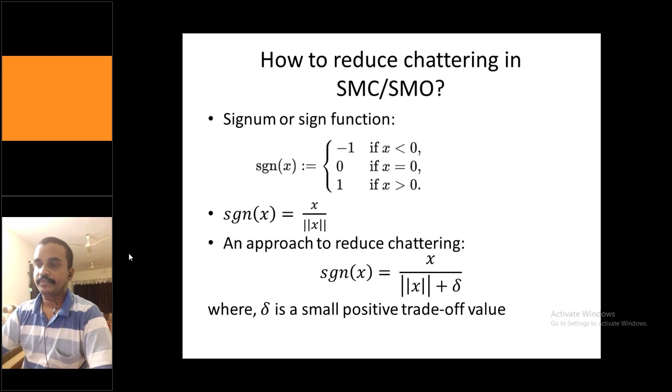So the approximation here is, if I write the signum function as x by norm of x plus some small tiny value of delta, the delta is a very small positive trade-off value. I will tell you what this trade-off is about.

In the code for sliding mode control, even the observer, we might be using some sign terms. What you have to do is replace this, USMC minus C into X, rho, keeping the rho the same, where the sign is there. We saw sign of sigma is for the sliding surface. So you just replace sign of sigma by sigma over norm of sigma plus 0.001, and this delta is what I have chosen for my particular application.

What will be the real-time implication of this delta when you use it for practical applications or other things? We will see that in a minute.

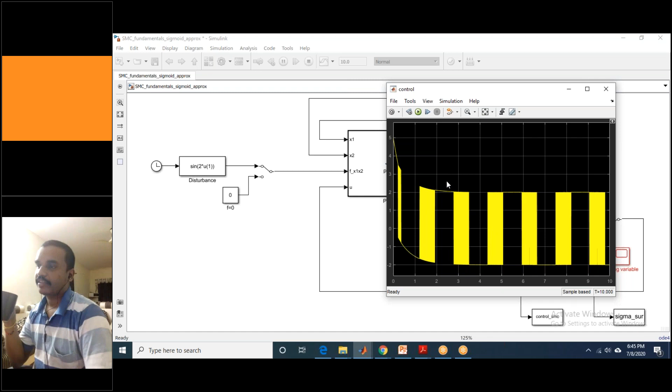And now I have connected to the SMC. There are two SMCs, one with the sign function and another one with the approximated sign function. So now I am operating our old sliding mode control with the sign function, and you can see that the control is highly chattering. There is the effect of chattering.

And now I used a 1 minute modification in that one. I just replaced that sign formula with sigma by norm of sigma plus delta. You can see that now I have switched to the other one. And now if I'm clicking this one...

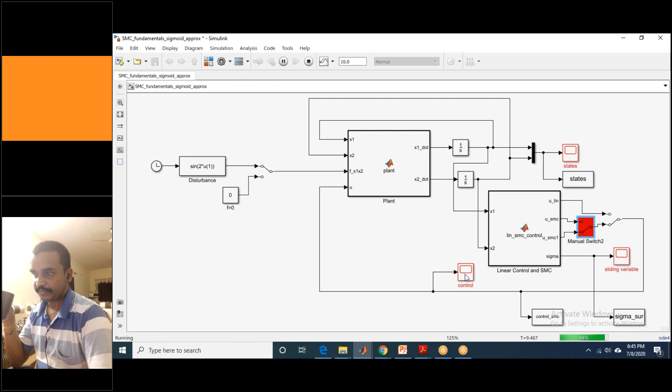First of all, I have to see whether there is any compromise here. You can see the states are very fine - both the states are converging. And this is the control signal. You can see the control signal is also smooth. So this is quite realistic for real life systems.

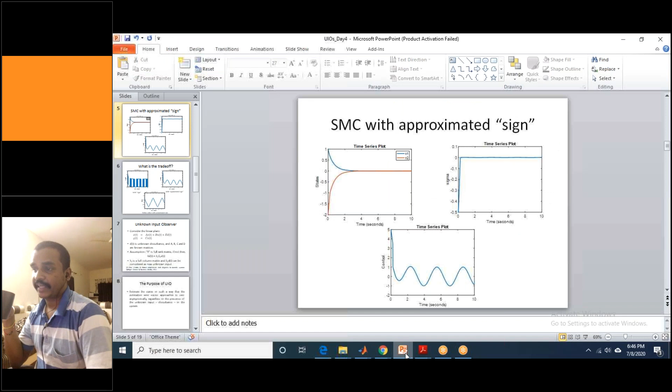So whatever denominator we are adding here, you can see the same thing - instead of going to zero, the sliding surface will have a small bound. So it will settle in that bound. How to select this is based upon your plant. If your plant parameters are very small, like in the milli or micro range, then you can select this as small as possible.

If your plant parameters are very large, then this delta value can go to very large values as well. So there is a trade-off. I have selected 0.001, 1 milli, and you can see that it is 1 milli, but nothing significantly different - you can see the difference in the plots.

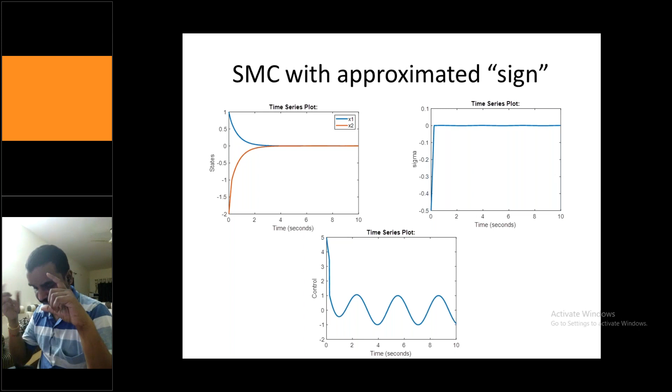This shows that sliding mode control is a good choice for several real life applications because it makes the system independent, or it actually decouples the disturbance or the faults from the system performance. So as soon as the sigma reaches zero, then automatically it makes the system insensitive to the disturbance. It doesn't matter how much disturbance you add, your sliding mode control will ensure that, provided it should be bounded, and only the bound we should be aware of.

One can always argue that I will select a very large value of bound and ask my sliding mode control to work for all world problems - it is not like that. If you are selecting a very large maximum value of the bound, your controller will become conservative, in a way that by one controller you are trying to deal with disturbances from zero to infinity. Then again there will be some issues in the control action. So there is a compromise based upon the problem at hand.

So this is the one. This is a sliding surface sigma. You can see that 0.001 is what we have selected. It is reflecting here.

Now what I want from you is you take 10 minutes of time. Please implement this. This is very, very much essential for the people who want to really dig into the sliding mode. This is the small trick which generally people don't know, and they will go for higher order sliding mode.

And other things. But in industry, it is working here, though it is heuristic in a way. This adding of delta, it is working. So when we gave this solution to some industry, it doesn't matter to them, as soon as it is working and it is very reliable, what kind of control you are using. If it is proven, and if you can prove on a prototype, and if they have a certain test simulator or some HIL system, if it is working fine for all kinds of different tests, they will do all kinds of tests.

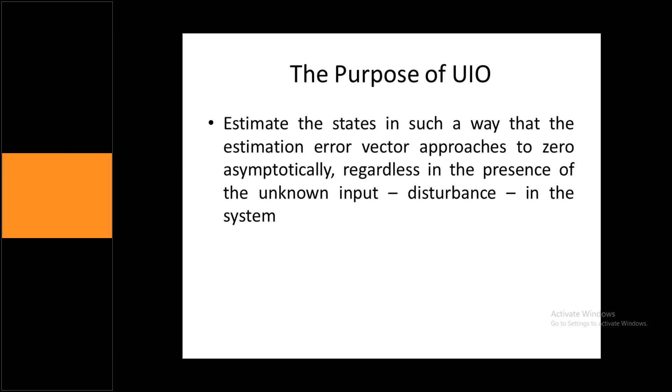For the time being, we assume that our purpose is to estimate the states of a plant in the presence of unknown disturbances. You don't know what is the unknown disturbance. It could be anything. It could be sine wave, cosine wave, noise, external disturbance, and so on. So we will see what is this.

The first step here is we have to select the observer structure like what we selected yesterday. It has two parts: one is the linear part, and the other is the non-linear part. The linear part is very much similar to the Luenberger observer, but the non-linear part has the sign term. So here also, for the unknown input observer, we are selecting two different parts. So this is the observer structure.

You can see z dot equal to what I'm interested in. I am interested only in this x hat. X hat is the estimation, the estimated value of the states x. So what is this x hat? X hat is nothing but z plus h into y of t. So to get this z, I have to integrate this z dot.

I'm coming back to this point. What is this z dot? To get this z, I have to integrate this one. This h is unknown, and this y is the output of the plant. We know what is y, from the plant we can get it.

So the matrices F, T, K, and H are to be designed to decouple the unknown input from other design requirements. That means F is unknown, we don't know. We don't know this T. B is known to us from the plant because x dot equal to Ax plus Bu. U, the control input, is known to us. We don't know what is this K.

This is the output of the system, we know. So from this, how to get this x hat is something like this. So this is my system.

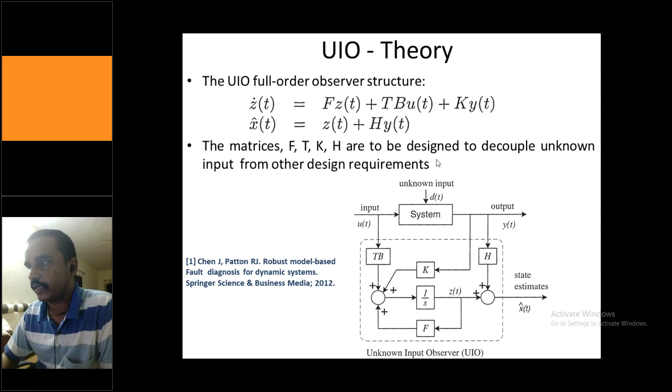So it is better if you take a pen and paper, and you do what is E dot equal to x dot minus x hat dot. You substitute x dot from the plant and x hat dot from your state estimator, then you'll be getting these things. Where I will assume that k equals k1 plus k2.

So my aim is to ensure that the left hand side, the right hand side should be f into e of t. In a very simple case, if it is a scalar case, if this f is negative, suppose minus 1, so what is this e dot equal to? Minus of e t.

So if I take the solution of this first order differential equation, if I assume that it is a scalar, then it will be an exponentially decaying function. And hence it will be stable.

If the error has so many vectors, like if error is a vector, that means e1, e2, e3, which is, if it is nth order system, fifth order system, so 5 error terms will be there. So how to ensure this particular stable error dynamics?

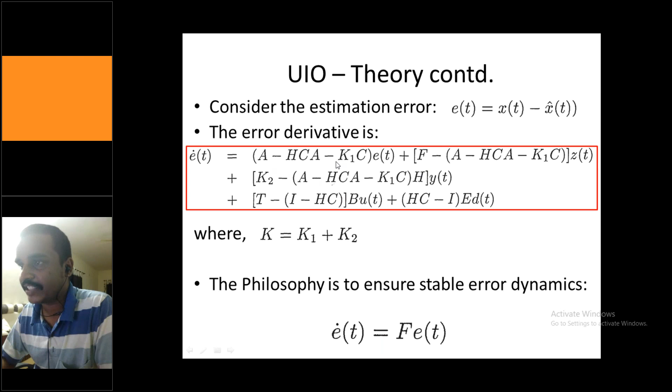Then k2 minus k2 will get cancelled, so this particular effect will get cancelled. Similarly, if I select f equal to this particular thing, a minus hc, then this term will vanish and this term will become f into e. We'll see in the next slide what is going to happen.

Though this looks numerically very intense, I just want to give you the flavor of how to select the stable error dynamics of the system. So this is the stable error dynamics of the system. What I want is e dot equal to f into e.

So what I substituted, this whole value as f. Now e dot equals f into e. Since this is also f, this f and this minus f will get cancelled, so the effect of z of t can be nullified. And then k2, as I discussed earlier, k2 equal to, this is again f into h. If I select k2 equal to fh, this fh minus this whole term is f into h, so this term will also vanish.

And if I select t equal to I minus hc, this term will also vanish. And eventually, if I select hc minus I into e as 0, this whole term will get cancelled. So eventually, if I substitute these values, my e dot will become f into e.

So what I'm doing here is I'm selecting the design parameters f, h, t, k2 in such a way that I'm forcing the error dynamics of the system to be stable, and hence the error will asymptotically go to 0 as t tends to infinity. That is how you have to select f and other values.

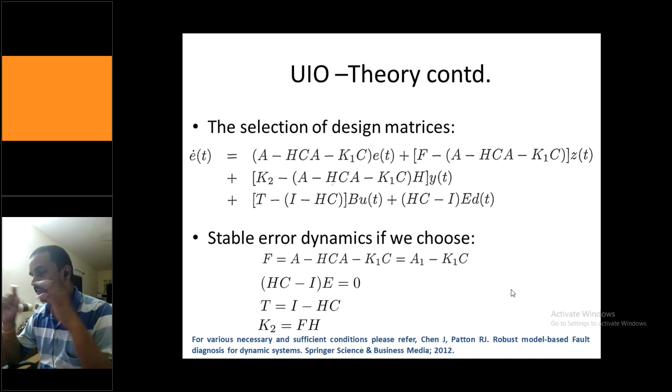So now, with the help of some tiny equations, I will show you how to estimate the faults as well.

So what you can see here is y equal to cx. If I take the y dot, then this is nothing but c into x hat dot, taking the derivative on both sides. The unknown input or disturbance can be estimated as y dot. What I'm saying is, instead of the states, I am replacing with the state estimate, because if I keep y dot equal to c into x dot, x is not known to us, so instead of x I am replacing it with the estimates.

So from this equation you can see, and later I will replace y dot with y dot hat as well to have more accuracy. So what I'm doing here is I'm just manipulating this particular equation, keeping this term, ed, on one side and all other terms on the other side. So what is going to happen if I keep this on one side and all the others on the other?

So this will become y dot. I will replace y dot with y hat, assuming that the estimate is the best one: y dot minus ca x hat minus cb u. So if all the terms go to the left hand side, on one side, then what you're left over with is ce into d of t.

So now what I will do is pre-multiply by ce. This particular symbol is a pseudo inverse, meaning that if c is not a square matrix, then how do you find it? The Penrose, excuse me, Moore-Penrose pseudo inverse is there for that.

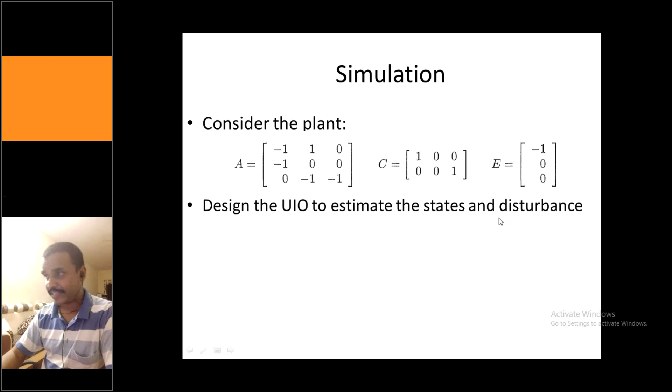As I assume that this is the plant which is given to us, now the aim is to design the unknown input observer to estimate the states and the disturbance as well. So how to do this thing? I will show you.

So this is the small tiny code, the Simulink diagram what I have developed. I will try to compare this with the block diagram what I have shown. Just give me a minute, I will just copy and paste that here.

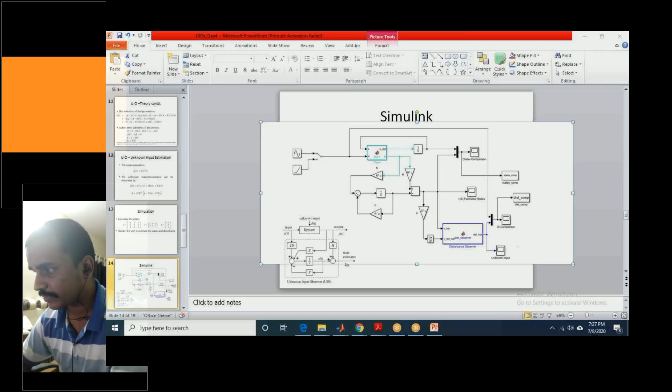Okay, so now it is ready. I'm sharing my screen now. So now you can see, although it might look bit tiny, you can zoom your screens if you're using the mobile or accordingly whatever it may be.

You can see the same thing I have implemented here. So you can see the plant. The plant has states x dot equal to Ax plus Bu. This is the complete plant, and in our case this b is 0, so this u term is 0. So there is no point in calculating this tb because b itself is 0.

So now what is happening? This is the two types of disturbance or unknown inputs I have considered. One is the sinusoid one, and the other one is the unstable ramp one. So this is the switch I can switch on for various disturbances. So this is my plant.

So this is the system. From the system, the output - so I am only worried about this output. I don't know what is happening with the state. Only the output through some sensors is available. So what is happening in this output?

So this is my particular term z dot. What is happening here is this k is getting multiplied with y, so that's why you can see k is multiplied with y, the same thing. And this integrated the same. Then this f, whatever you are getting, this z dot here, z here, that f into z, so this is getting added. The same thing you can see.

And here you can see that the state estimate - this is my state estimate, the complete state estimate. So what is it? It is nothing but h into this y, h into y plus this z. So this is what I'm getting here, the state estimate.

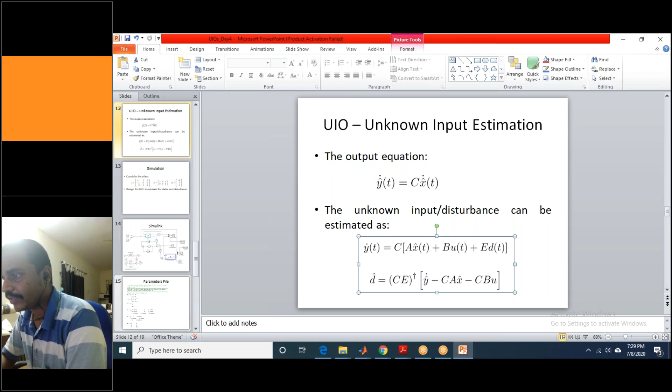If I copy and paste it here, you can see this particular expression needs y hat dot. So y hat is coming here, C into this is x hat into C into derivatives. This is y dot I'm getting from here. C and A are already known to us. This is the plant parameter, and x hat is also required, so x hat is coming from here. In our particular case, since u is 0, this particular term will not be there. And E is known, and C is also known to us.

So if I do like this, this is the code: A matrix, C matrix, E matrix - this is known. Fk and H, by using the formula we discussed, you can easily calculate this Fk and H. So this is the parameter file. The first step is you have to run this parameter file, and this is my plant.

My plant is x dot equal to Ax plus Bu plus Ed. However, since u is 0, there is no u term - x dot equal to Ax plus Bu plus Ed, and y equal to Cx. This is my plant code, so inside the plant you have to dump this code.

And this is the disturbance code. If you see this disturbance code - PINV, as I told, Moore-Penrose inverse or pseudo inverse is P-inv because C into E is not a square matrix. So this is the disturbance input.

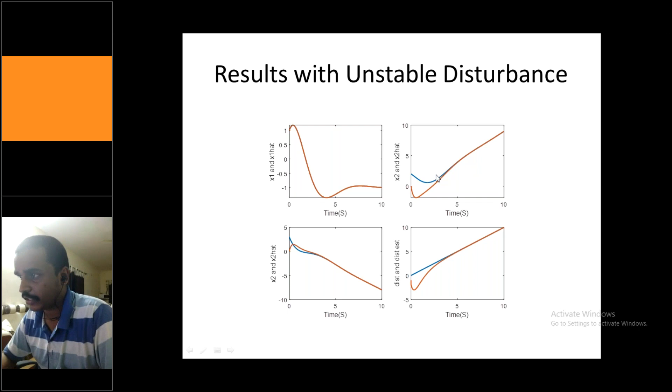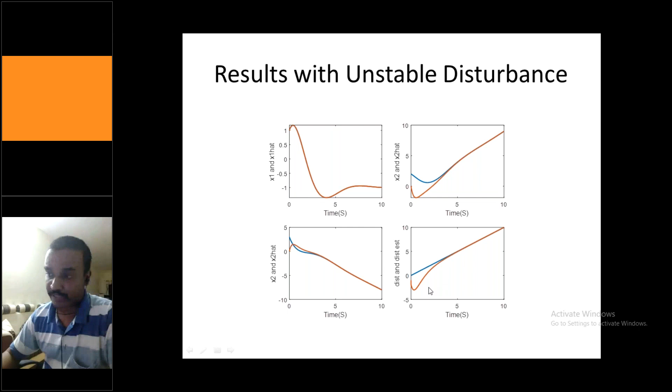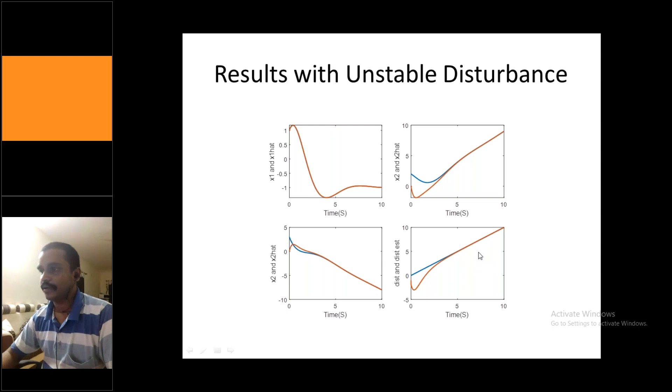You can see that I started with different initial values of the plant and disturbance. However, after certain time, both of them have converged. So this is what I would like to tell about the unknown input. What I will give you now is only this PDF file.

I will not give you the skeleton code because you have enough experience in developing things. If I keep giving the same skeleton code, after the FDP you won't be able to do anything on your own. So I'll give you this - this is what you have to build. You have to build it on your own because these are just the gain blocks. All the blocks you can get from the Simulink library, and this is the d by dt block.

And this plant is given to you - this plant code is the parameter file. First you have to run this parameter file, and whatever plant code you're seeing, create your own m file and save it. The disturbance observer also, what you are seeing here, you can copy and paste this one, and you build this, and try to build this one on your own.

And see if you can get the simulations or not. So for this I'll be giving you 45 minutes of time. It's around 7:40, so I'll give you 40 or 45 minutes because it will take some time for you to go through this, and then we will discuss what to do next.

Then I will discuss about the papers - 2 papers I'll be discussing. One paper, exactly a 2019 paper, not very old, and I will show you the concept you've learned, how they applied it to a particular system, and how it got published in IEEE Transactions on, I think, Smart Grid. The other one is my own paper, published in Automatica, which is a quite good journal as far as control systems are concerned.

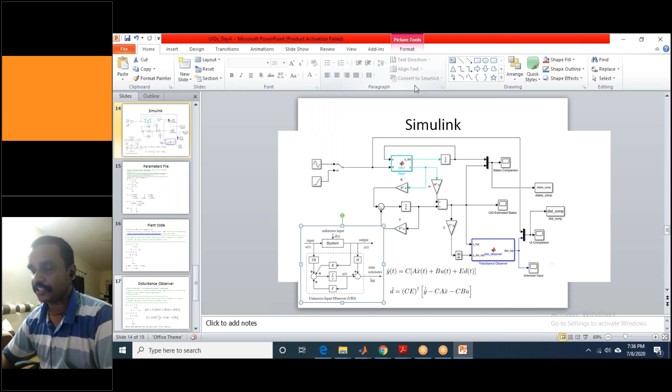What do you mean by fault physically? Physically, the fault can be anything. Suppose if you are measuring your speed with some sensors, and the sensor has some bias fault, that means instead of 10, if it is giving you 12, then that can be treated as one practical fault.

As we keep going, things will get a bit difficult, a bit tougher - just to ensure that after the workshop you can do it on your own. Otherwise it will be kind of spoon feeding, which I don't want - that is not the purpose of this workshop. So you have to be on your own. That's why slowly we have increased the complexity. First day you might feel it is very simple, second day a little bit difficult, and slowly we will increase the difficulty level.

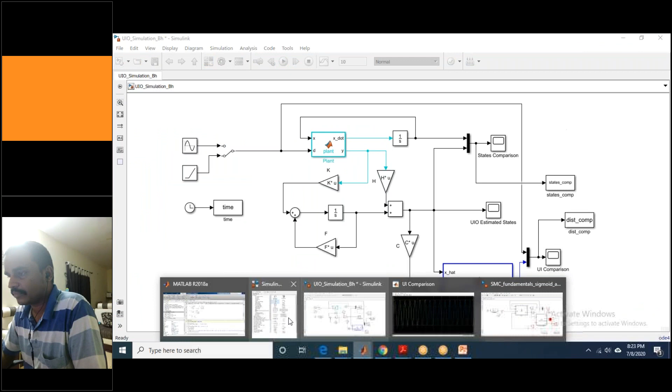So this is the same code. Let me clear everything. Now I will run the same code which I gave you. All the variables A, C, E, F, K have come, and this is the Simulink diagram. Hopefully it should run - if it's not running, then I might have given you the wrong file.

It is the same code which I gave you, running now. I will show you the live results so that you believe whatever I gave you is accurate. It is initializing my code - you can see it initializing here. It ran. I will show you the results, how they look. So this is the unknown input comparison, where you can see how it is for the unstable system.

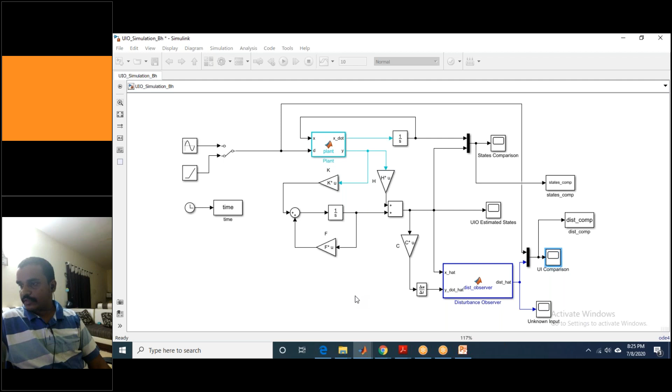I will change this to a sinusoid signal - it's taking so much time, something got stuck it seems. Let it respond, because several applications are running parallelly on my desktop. This is the comparison - okay, the thing is my Google Drive is getting updated, so that's why.

Now you can see I have changed to the sine signal, and I set the frequency as 10 radians per second. If I'm running it, it's backing up all the unsaved data because that's the option I kept for compiling. It is running.

You can see this is the unknown input at a frequency of 10 radians per second. After a certain time, one can see the disturbance. Now, just to demonstrate, I will give a very high frequency - let's say 100 radians per second - and I don't want to see it for 10 seconds, I'll set it to 1 second, and you can see the system response is slow.

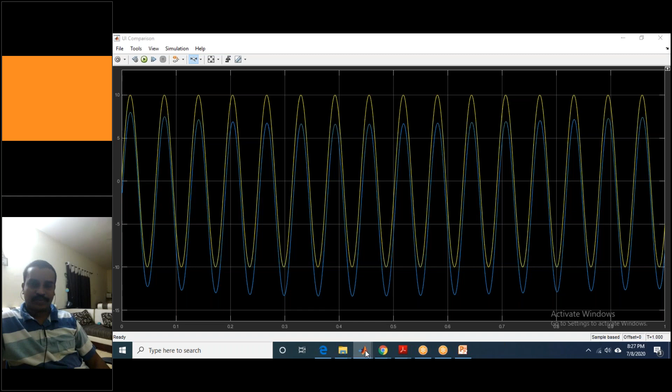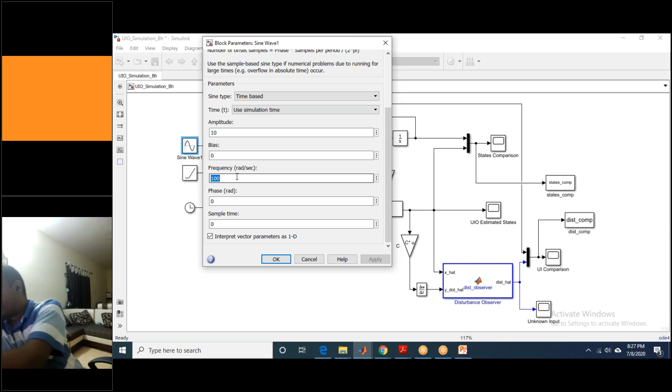That's why it couldn't do that. To get a faster response, you have to choose faster gain values, K values, very fast - so there is a trade-off. If you want very fast signals to estimate, you need faster dynamics. Otherwise, let's see if I run it for 10 seconds whether it would be able to do it or not. You can see it took some time, around 5 seconds, and then it slowly started.

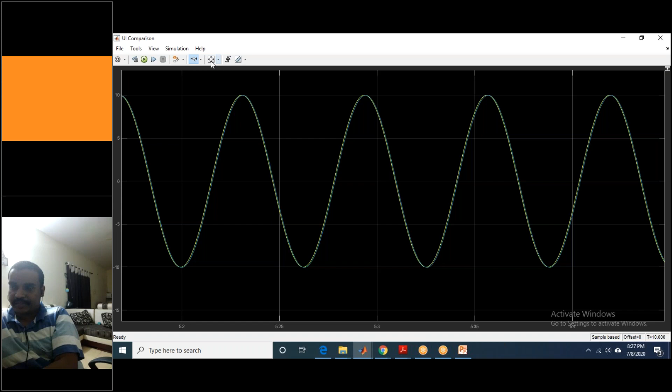You can see that estimation is happening. So it took some more time, sir. Delta U by delta T block, sir?

It is a differentiator block, sir. Delta U, yeah, this is actually the derivative. I took the photo and sent it to you as well, sir. Numerical derivative block. The same numerical derivative. Where can we get this one, sir?

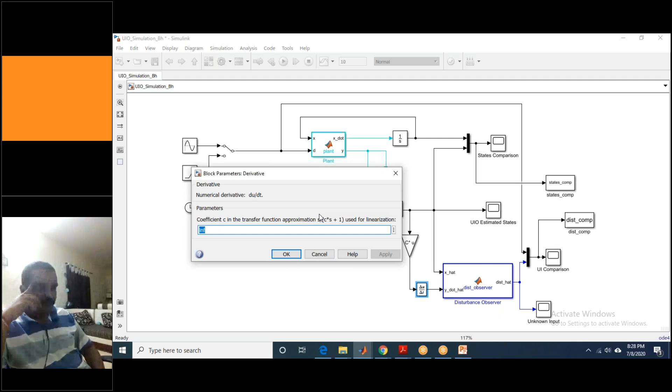You can search the numerical derivative in this toolbox, in this search engine. If you search, it will show up, sir. Otherwise, you can use the simple d by dt as well. I will show you the simple d by dt.

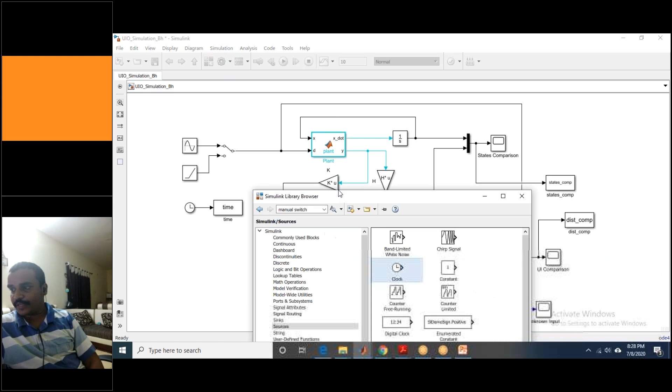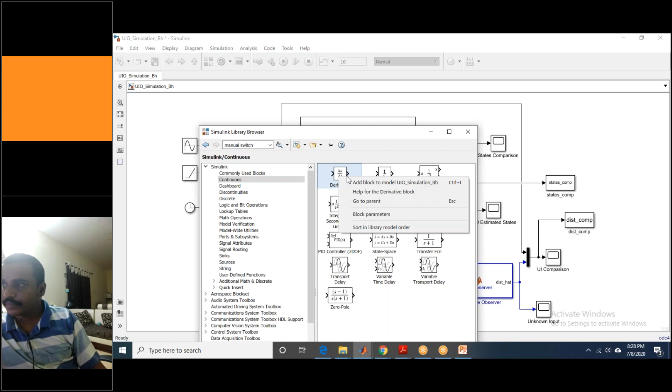Derivative block, you can see this one's a derivative block. Yeah, this is the derivative block, sir. The same simple d by dt. In various versions, there are different d by dt's. So for derivative blocks, you go here, to the continuous section. The first block is the derivative block.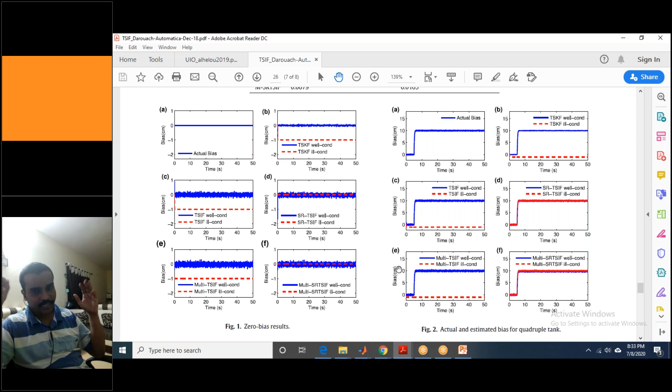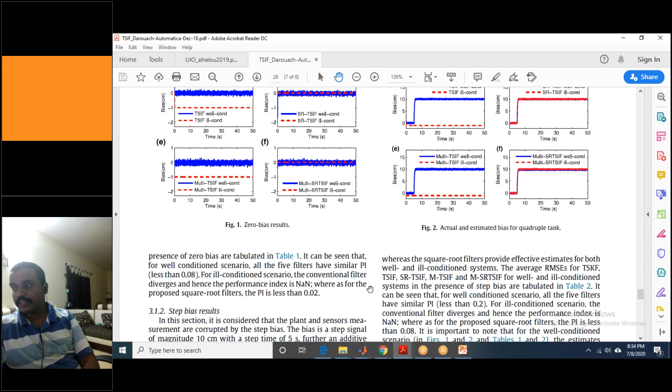Suppose one pole is located at 10 to the power 20, minus 10 to the power 20, and another pole is located at 1. You can see that it is highly ill-conditioned because the ratio of the maximum eigenvalue to the minimum eigenvalue is very large. During those conditions, one has to be very cautious, so we proposed some kind of square-root versions as well. This is one paper which may not be of much interest.

This paper is the recent one, as I told you, this is the 2019 paper: deterministic dynamic state estimation based. Here they are using deterministic, meaning they are not using any sensor noise, your system is not stochastic, it is deterministic. Dynamic state estimation based optimal LFC of interconnected power system using unknown input observer. So here they have used the unknown input observer for the state estimation of the optimal LFC. This literature review is completely shit, we will not go through that one.

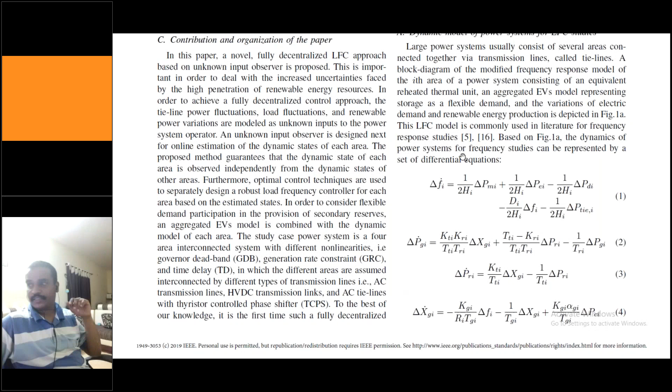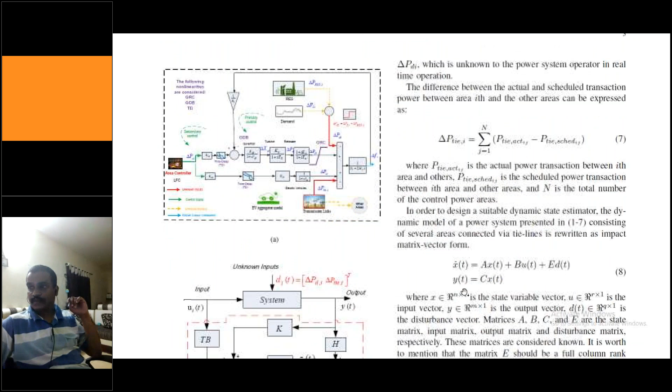So this is the plant what they have considered: delta Fi, delta PGI, and delta XGI. This I means for various areas they might have taken. This is the thing we have already seen, if I zoom this one you can see it is very much known to us. Similar thing we have discussed: turbine, governor, rather we have not used the GRC heater, but a similar two-area power system we have discussed. So the structure of this particular plant looks very similar.

You can see there are unknown inputs, control signal, unknown models, and known output. So the measurement is known, the model is unknown, the control signal is known, and the inputs, this red one which are going in, these are the disturbances, so unknown inputs.

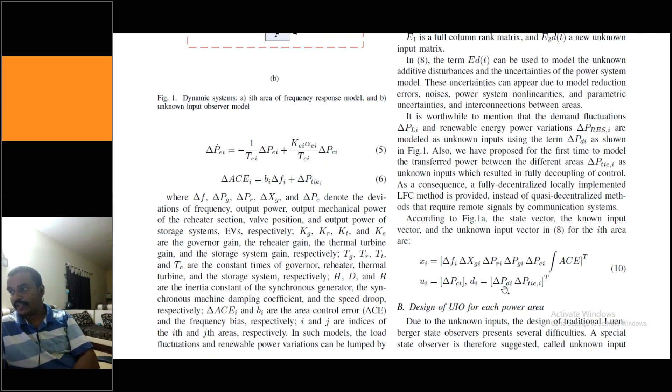This is the actual thing they have done, the same structure they have used: x hat equal to combination of y into h, plus z, t into b, and f into other things. In our case, in the simulations, the input is 0, so we assume this particular channel is 0. The same equations we discussed here, the equation is the same because he has taken the information from the same source. Here he is using a sixth-order plant, and one plant input, whereas two disturbances are affecting the system.

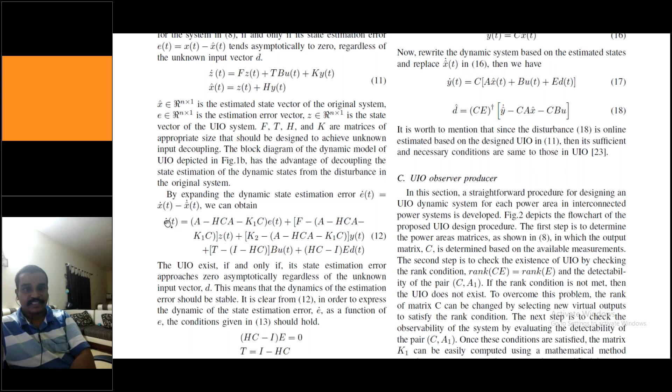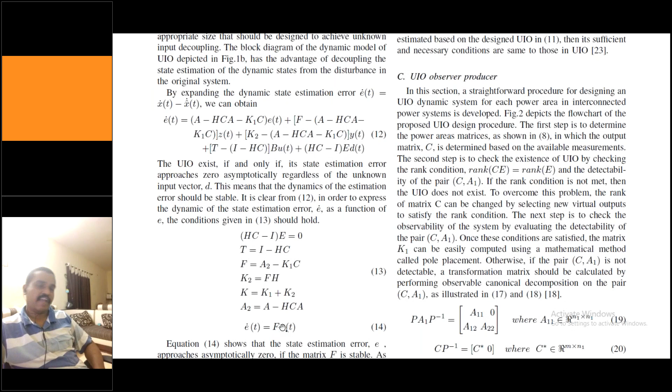So they have designed the unknown input observer for each power area, and this is, if you remember, exactly the structure we discussed, and this is the error dynamics e dot, how it is coming, and this is the selection of the various constants we have seen. If you select this, it will ensure e dot equal to fe, provided this f you select as stable, and this is the same disturbance observer we have seen and designed, so this is unknown input.

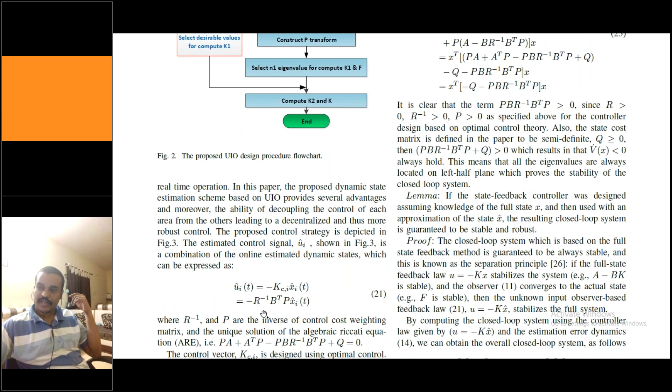Various mathematical analysis they have done, which is of not much use, stability and other things, if you are interested in finding these things. The control law they have used is the LQR control law, straightforward LQR control law. In our case, the control law is 0, u equal to 0. So they have used LQR here, and the control law they have used is based upon estimated states. In general we have discussed LQG, the combination of LQR and Kalman filter, but here they have used LQR as the controller and unknown input observer UIO as the estimator for the states as well as for the disturbance.

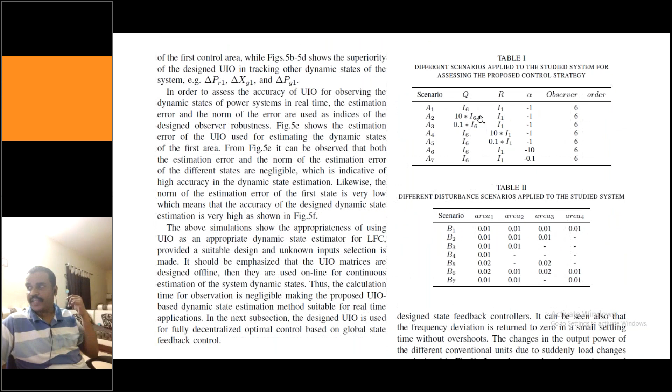They have done the simulation with different values of Q and R, and different parameters are given here. These are the results, showing various state estimations and how they are happening. This is the error. You can see that both the state and estimators are doing very good.

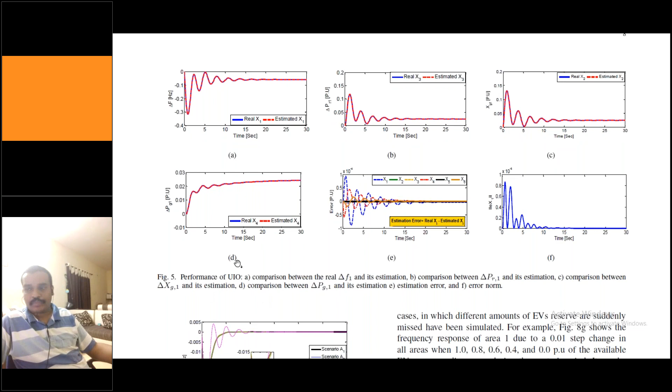But for practical reasons, if this paper comes to me, I might reject it, because the real and estimated states, they have assumed to be the same, so the initial conditions are the same. But in general, for practical systems, you don't know the initial conditions. The observer or controller should work for a different set of initial conditions as well. But here, unfortunately, he has taken the same initial conditions, if I'm not wrong. Otherwise I'd have to go into much more detail.

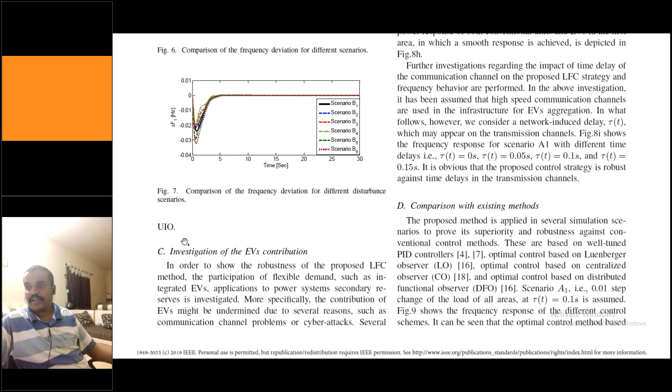Here you can see what is happening for various scenarios. They have done investigation for various types of simulations, various frequency deviations, and various cases - faults and other things they have estimated. Here they have compared the proposed method with PID, CO, and LO, the Luenberger observer, and shown that the response is very good. Here are all the parameters you can see.

So what I can say is that all the ingredients required for this paper we have already discussed. We discussed the two-area systems, so their model is more or less very similar. We discussed the LQR, how to design it for various problems, so that is also known. And we discussed how to design the unknown input observer, so that is also known to us. If we combine all three of them, then that becomes the paper.

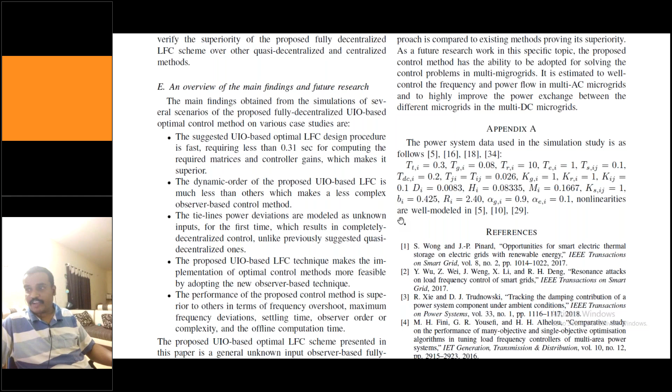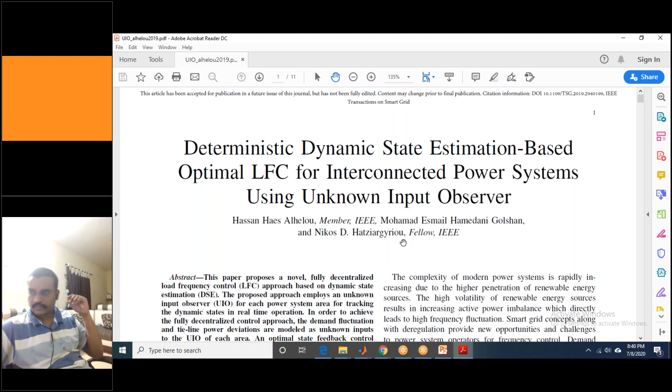You're always welcome. Yes sir, this is Dhananjay from NIT Raipur. Sir, actually in this paper, I think the unknowns, they are assumed unknown inputs. I think they have not assumed - they took unknown inputs, but they are not estimated.

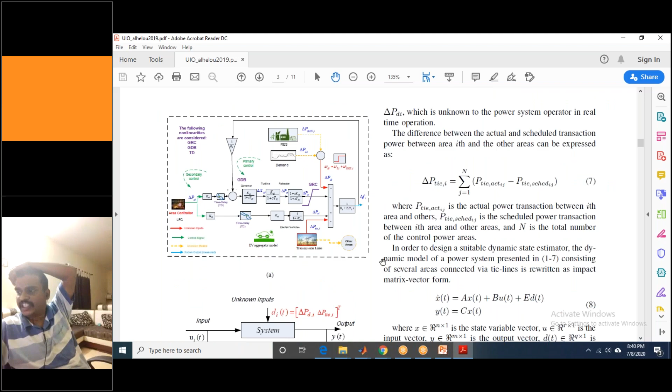They are not estimated, only they assumed some unknown input given to the plant, I think, in this system. I think the estimation also has been done, because they are mentioning this estimation formula they have given. So what I assume is that since the disturbance, they might have estimated as well. Let's go into the details, sir. They wrote one line that there are power fluctuations, load fluctuations, and renewable variations, modeled as an unknown input to the power system operator. Okay, model fine, so they have these three variables.

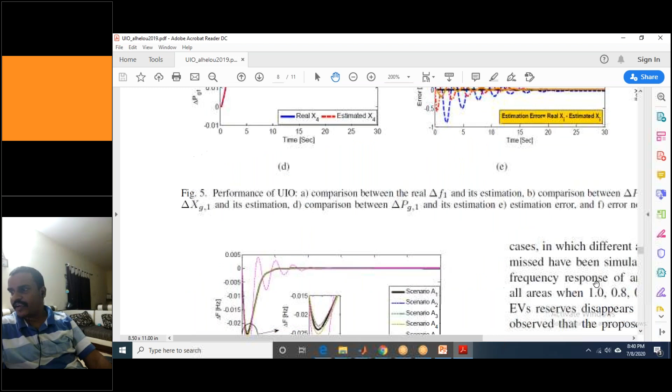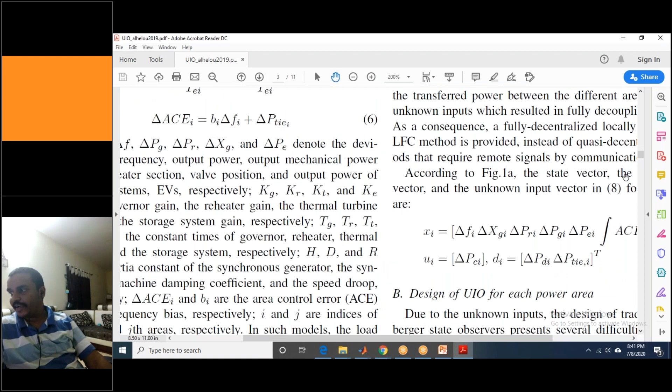They assume some delta unknown inputs, and from there they are estimating the state. Actually, I think in this - no, here you can see delta P's are the unknown input, right? Let me see - delta PD and delta P-tie are the unknown inputs.

Even if they are not estimating, estimation is not a big problem - only one line of code will estimate that, as we have seen. Try to estimate, then give some - their motto is not the estimation, I think. Their aim is not to estimate that. I think they assume some unknown input, and from there they show that even in the presence of unknown input, the state is accurately estimated, some kind of thing - yes, that is because they have done everything.

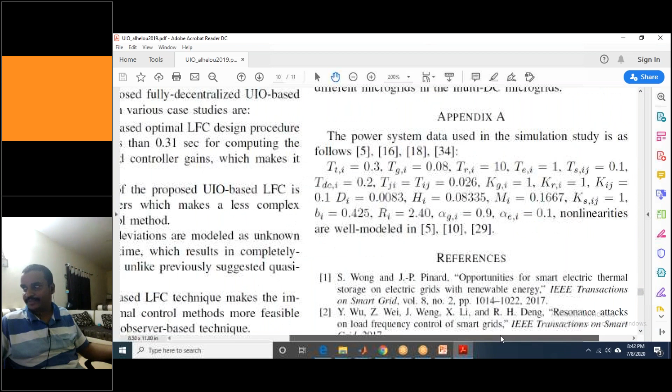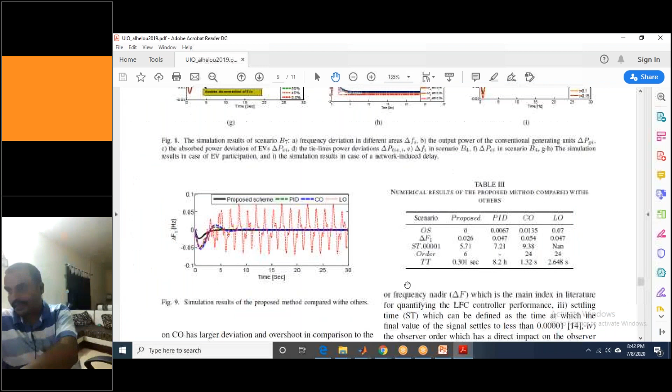If they also do that unknown input estimation, that will also be good, but they haven't done it. That's fine, but they can do it easily - it's only a single line of code that will do that. So that's what we have. Maybe you people can do it, right? You know how to estimate it - give some sinusoid, give some step. Already they have given the step - just check whether you could reconstruct that unknown input or not.

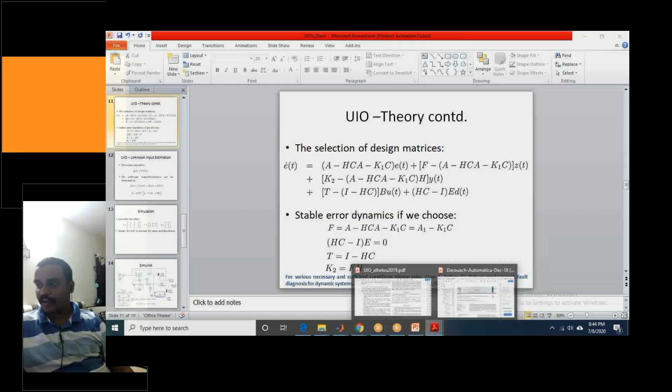Generally, as far as robust control terminology is concerned, the disturbances are slow varying signals, low frequency, and we call the high frequency signals as noise. There is a mixed sensitivity approach in robust control to deal with this based upon the frequency spread. We can go for two different types of strategies called mixed sensitivity. In the low frequency we try to achieve some specification, and in the high frequency, that is for uncertainty, which can come from various aspects. The plant is...

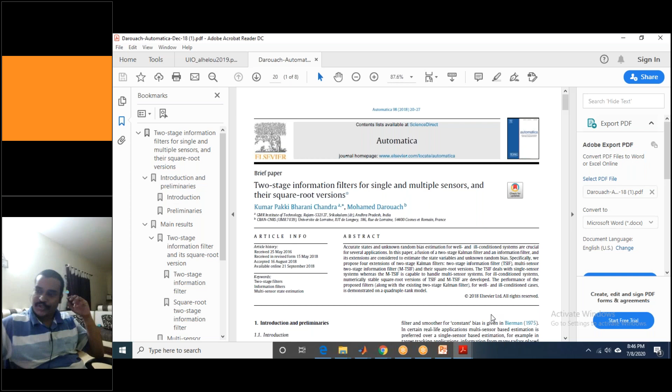And the faults, generally there are many types of faults possible for a practical system. I will show you how many faults are possible. We have done something, but before that, let me activate the quiz because it is 8:45.

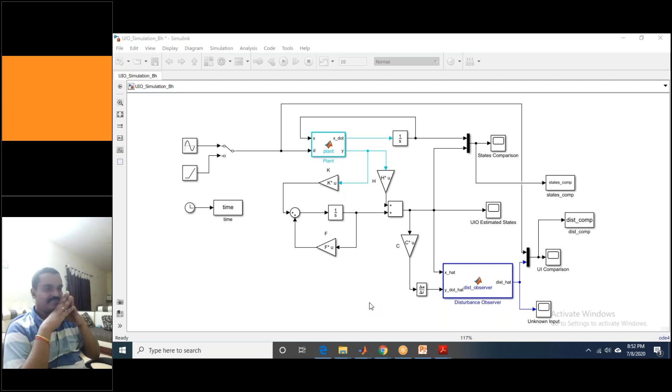Okay, so the matrices, there is matrix into U, I have already changed it into matrix into U. It's not working. It will work, Ravi. It will work, it will take some time. You have to debug.

Everything is correct. The code I gave you is correct. The simulation diagram I gave you is correct. It is working here, I have shown you for any kind of thing. So now it is your turn to see.

Okay sir. That's why I have not given you the skeleton. Why have I not given you the skeleton? If I give the skeleton, you would just follow it. All of you would just copy and paste, and it would work fine, but that's not the thing I want. I want you to be on your own from now.

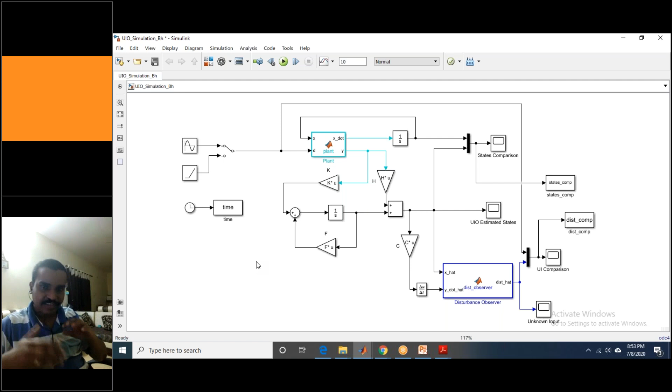The next thing will be a bit more difficult: backstepping. So slowly you will see the difficulty level increase. So try this one, check all the blocks and see what is happening. That's what I can tell you. Okay, sir, okay.

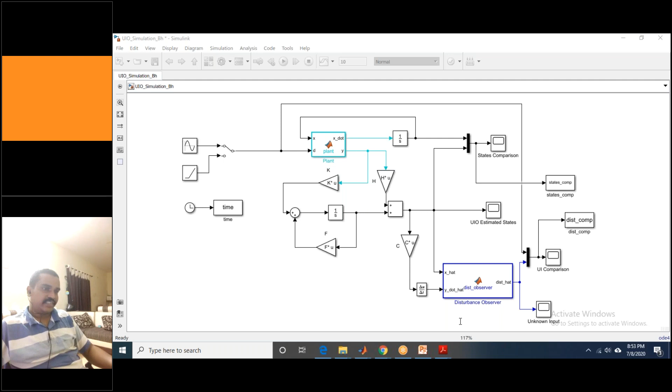I am asking with respect to simulation or initial conditions that you have to think about. From the results and slides I sent you, if you see the figures, you should make out what initial conditions I have used. It is nothing but 1, 2, 3. I used the initial condition for the plant, and I used 0 for the estimator. So I gave you this answer as well.

Banu, this was Banu. Yeah, got it.

Is it possible to make the estimation error time controllable? For example, if estimation error is less than 5, yes, you can make it. The only thing is, the k value I have selected, if you go through the literature, I have selected the poles as -1, -2, -3. If I change the pole locations to -10, -20, -30, yes, you can make the convergence faster.

I could not complete because of an issue with MATLAB and my laptop. Okay, no sir, there is an issue on the input side. Yeah, you guys now have to slog hard to sort out these issues.

You will get it, I know you will get it. Just be patient, have patience. Go through each block and try giving different blocks, so that will be the learning. See the older MATLAB files I have given, what I kept inside. So all the basic ingredients required to cook biryani have been given to you, and the recipe has also been given to you. Now it is your turn to try, and let the biryani get burnt the first time, second time, third time, and later on you will enjoy the taste.

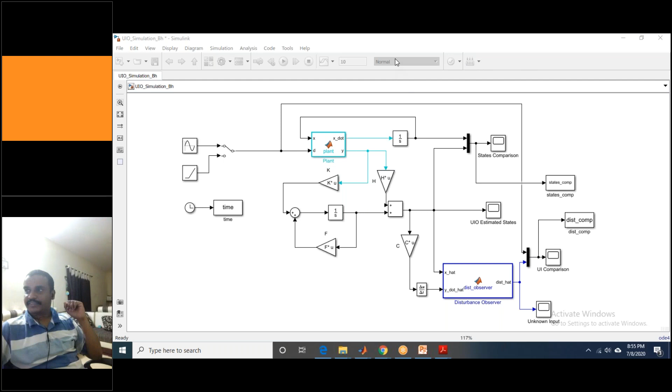Tomorrow we'll be discussing the backstepping controller. We will go through one research paper and try to see how to solve that paper, how to apply the concepts we are going to learn. Tomorrow I will not give you the simulation diagram directly; I'll give it to you inside the blocks, and you have to write your own code, with a little bit of a skeleton. I will give very little, small things. So that's the way I'm planning for tomorrow.

Day after tomorrow is the last one, right? Yeah. So what topics are we left with? Backstepping and the extended Kalman filter. So tomorrow I will try to cover both topics, whereas on the last day you'll get an opportunity to revise things and cover anything else if possible.

Hello, sir. Hello. Hello, sir, yeah, yeah. Sir, could you please explain your paper? Okay, before I explain that paper, where is that paper? I will explain, but it will be very new and mathematically very intense, but I will just give you the flavor of what it is about.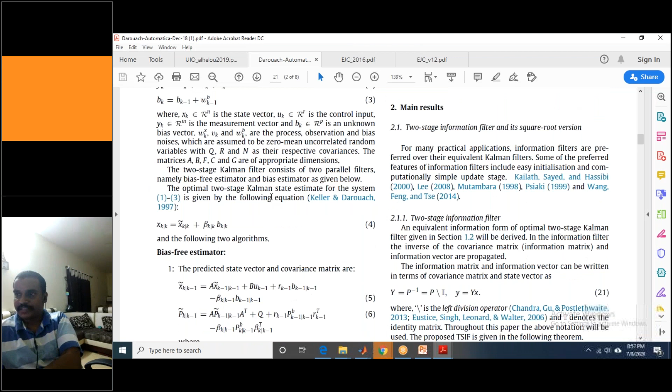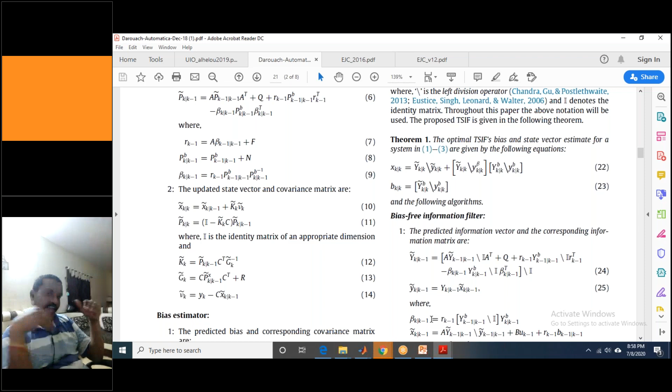This is the paper, and this is the bias. This part is standard in the literature, which was proposed long back in 1997 and so on. Two-stage filters or information filters were also proposed, but not for fault estimation. We proposed the two-stage information filter for fault estimation. Basically, we estimate the bias in the information filter parallelly, along with the state, and later combine both to get the combined two-stage information filter (TSIF). The same thing you saw in the unknown input observer: two different filters working in parallel. Z is working parallelly and X is working parallelly, and then you combine Z and X to get the desired answers.

Why I'm calling it the square root filter: instead of propagating the covariances, I'm propagating the square root of the covariances or the information matrix. This gives an added advantage in terms of numerical stability.

Suppose your processor has limited capability, then the square root will ensure double precision. If your computer or processor can see up to only 3 decimal places, normally it cannot see smaller than that, like the fourth or fifth decimal place. With this square root information filter, it can automatically see up to twice that precision. So even if the process can only see up to 3 decimal places itself, inherently it can deal with up to 6 decimal places. That's why we use the square root information filter.

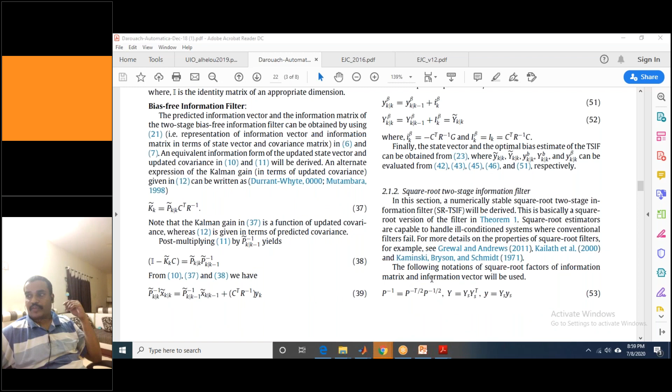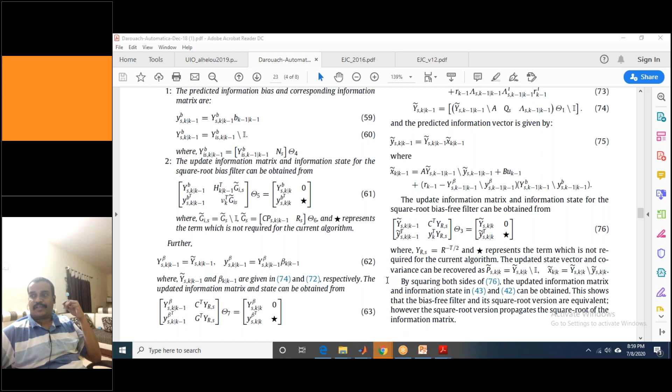We are trying to propagate the square root of the particular covariance matrices. Lots of math is involved in this; we have used QR decomposition and J-unitary transformation to decompose the matrices, and to ensure the positive definite matrices do not lose their properties, among other considerations.

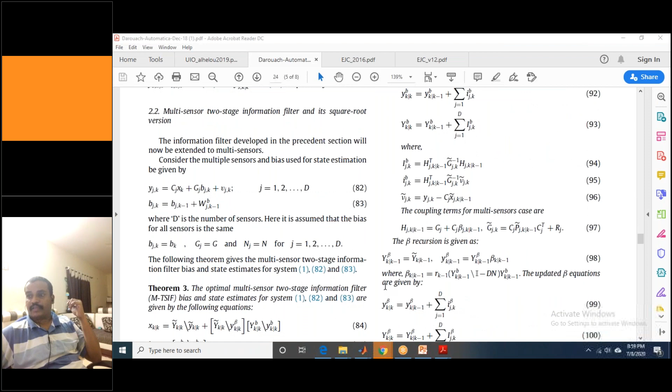Yeah, this is the one.

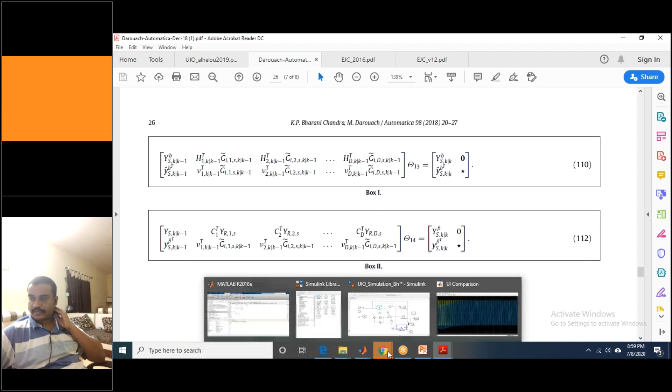Hello. How do we find the square root in MATLAB? We have to use a QR decomposition. Sorry, your voice is not clear, Ashwin. Hello, I will text, sir.

I will text. Yeah, this is what I was telling you, different various types of faults. I think my screen is not shared. I will show you that, how to consider the various types of faults.

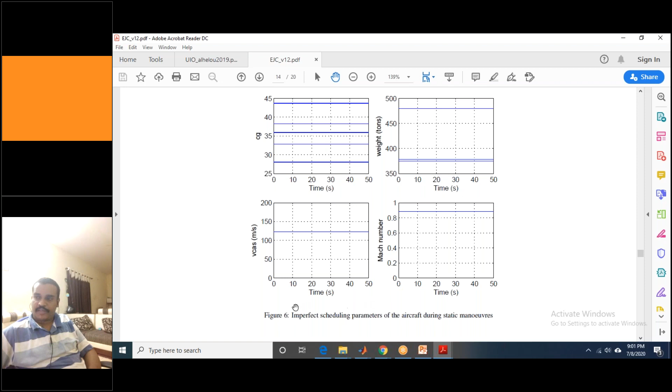This is alpha fault, and we have reconstructed, and we assume that some of the parameters are also imperfect, and that is for the linear parameter varying system. So this is the aircraft pitch deflection, and for all 222 plots is that one.

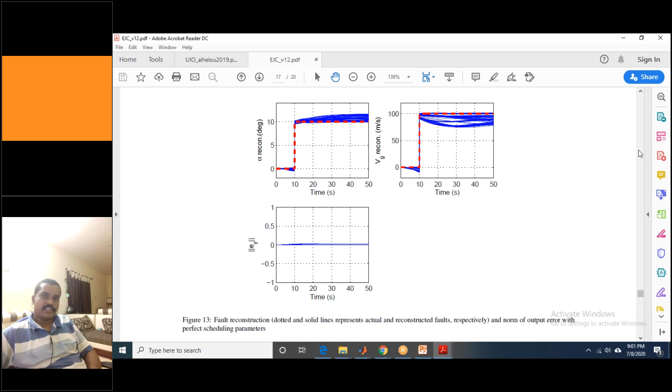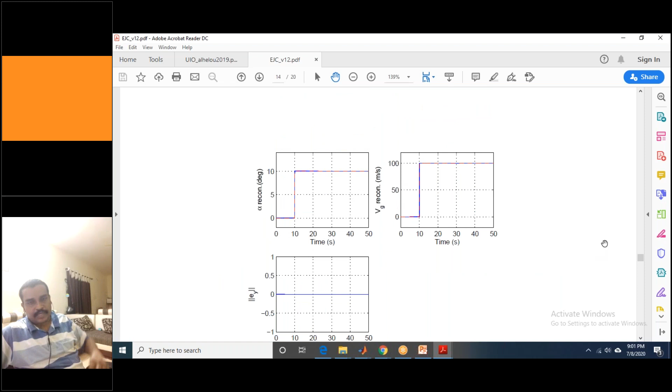And it was implemented, they have tested on the crash data as well, so real data, and it works fine. Whatever results you are seeing, it is actually not on the simple numerical model. This data has been captured from the aircraft crash black box data, and we have implemented and tested this.

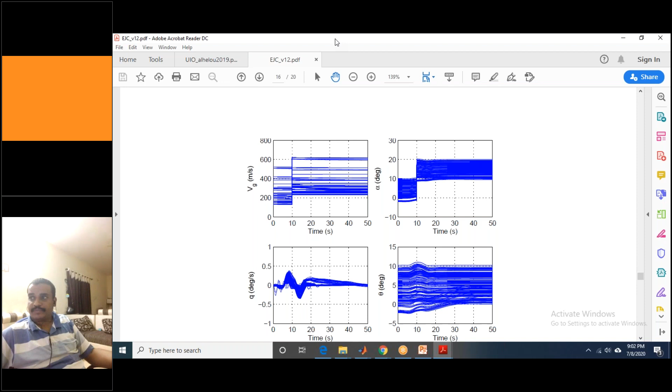Okay, so now this is 9 o'clock. So I'll be, so can you please share if you have any queries. Sorry, hello, can you please share the paper that robust model based fault diagnosis for dynamic systems?

Oh that IEEE paper, you mean to say that IEEE paper? Not so, Springer Science and Business Media 2012. That is representing UIO theory in the slides. No, that is the slides. Let me see.

Because we will be needing initial conditions. This one is the textbook, sir. This one is the textbook. Actually, this is a textbook, it is not the paper. It is a textbook. Okay, in the Simulink, how do we get the initial conditions, sir?

I mean, for the Simulink model, in the, you can just double click that one. Double click, and there is a there, by default it is 0. You can give different initial conditions there. So we can give any value to that, or?

Yeah, it is up to you. Suppose if it is a brushless DC motor, let us assume you don't know what is the initial rotor position. Rotor position you cannot exactly fix at 0, and you can run the motor.

So it should work for any non-zero initial conditions. Suppose, for example, if it is an electrical circuit, suppose initially the capacitors are charged or inductors are charged, so there will be some initial charge in that one. So during those cases, you have to give some initial conditions to see the realistic effect for the system. So that is based upon the problem at hand.